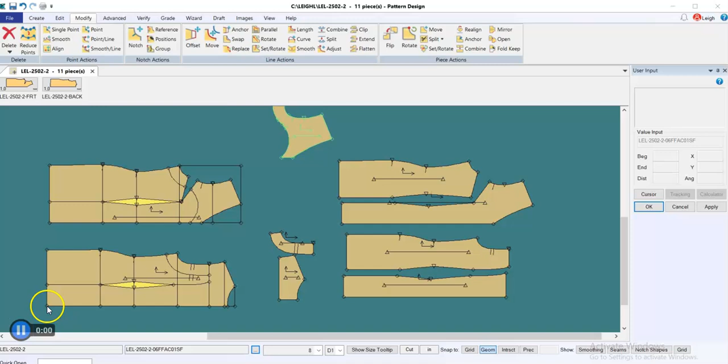You're going to need to add seam allowance. In the handout, I specified 3/8 inch seam allowance all the way around, and then 1 inch double turn hem at the bottom. So I'm going to show you how to do the double turn. You guys know how to add 3/8 inch seam allowance to pieces. Okay.

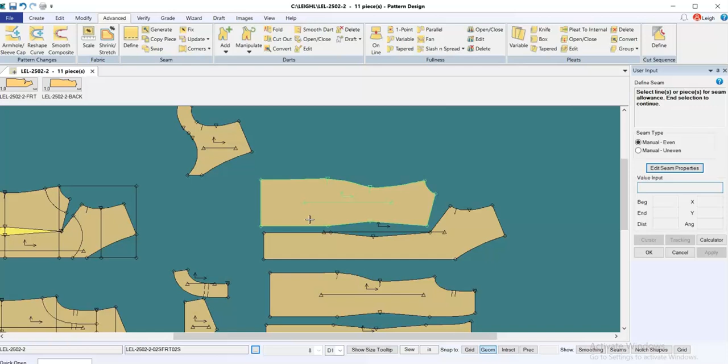I have seams turned off. Okay. You could even just select all of your pieces and say 0.375. Okay. For the bottom hem, you're going to select your center front, center back, side front, side back. And you're going to give 1 inch.

Okay. Now, the double turn comes from corners. You're going to go corner, turn back. You're going to choose second fold, 1 inch. You're going to notch extension, and you can go ahead and notch both sides. Okay. You're going to select the bottom line, select the bottom line, select, select.

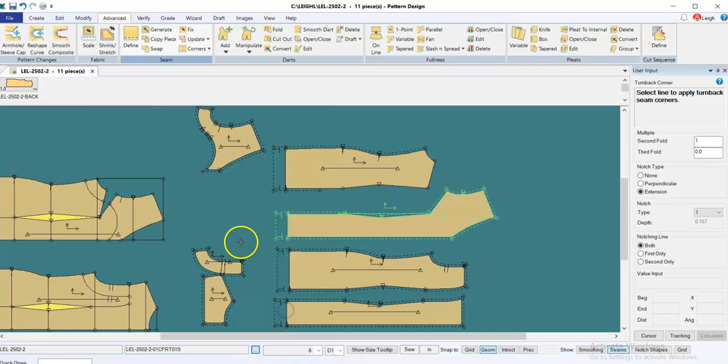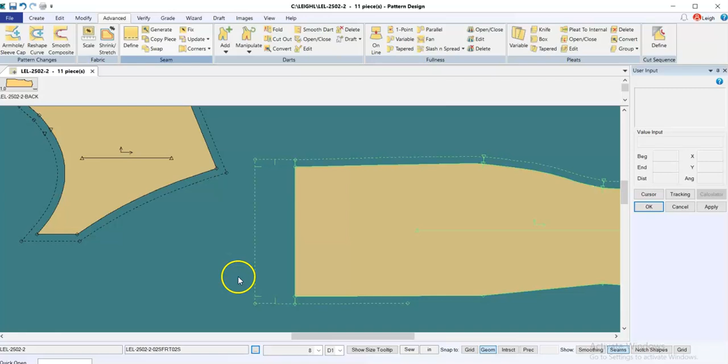Okay. So basically what that does is it takes your already existing 1 inch hem and it adds an additional 1 inch fold. So you could do a 1/2 inch fold and then a 1 inch fold. It's up to you, but all you're specifying is that second fold when you do the corner, and it's going to add on to your already existing seam allowance. So now I have a 1 inch double fold. I get a notch there. If my piece was super shaped, I would get a nice shape, and I wouldn't have to do that manually.

So once you're done with all of your pieces, you're going to close your model. You're going to go and open it in Model Editor. In Model Editor, we're going to first name our categories.

Okay, this is first piece. Okay. This is front measure. I'm going to call these my measure pieces, back measure, because that's their purpose right now. If I wanted to go trace off different pieces, change the style lines, they're just kind of that block piece that's holding my measurements. I'm going to use that code that's in the middle of my pieces.

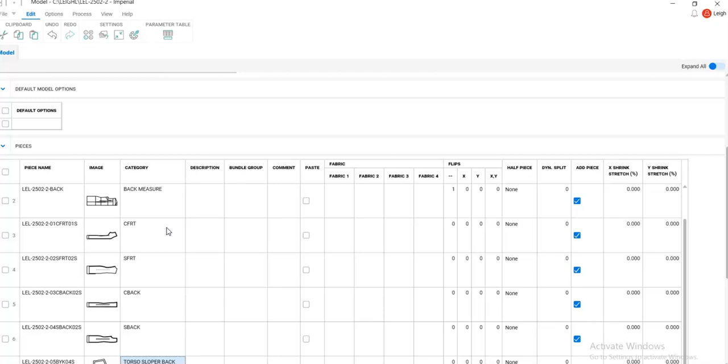Side front, center back, side back, back yoke. Oh, I do have those temp pieces in there. Okay. This is back facing, front facing.

Okay. I am going to change this to 0 for my measure pieces so they don't show up in my marker. For center front, I want 1. For side front, I want 1 and 1 with flips. Center back, I want 1 and 1. Side back, I want 1 and 1. Back yoke, I want 1 and, nope.

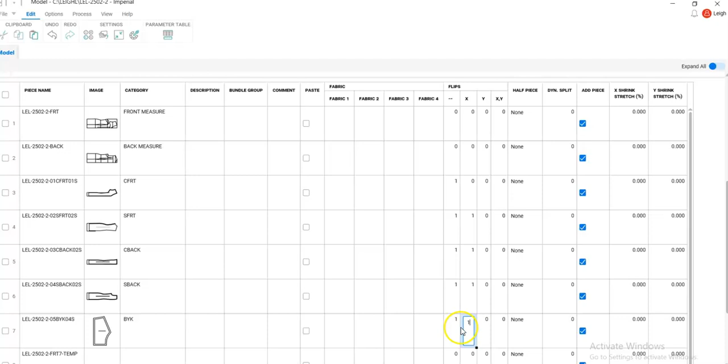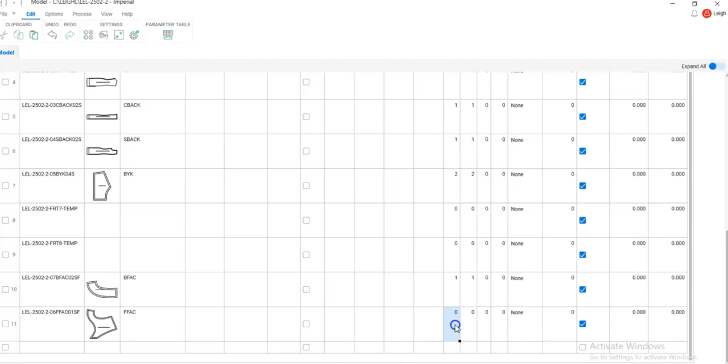Back yoke, I want 2 and 2. These I want 0. Back facing, I want 1 and 1. Front facing, I want 1. Oops. 1. Okay.

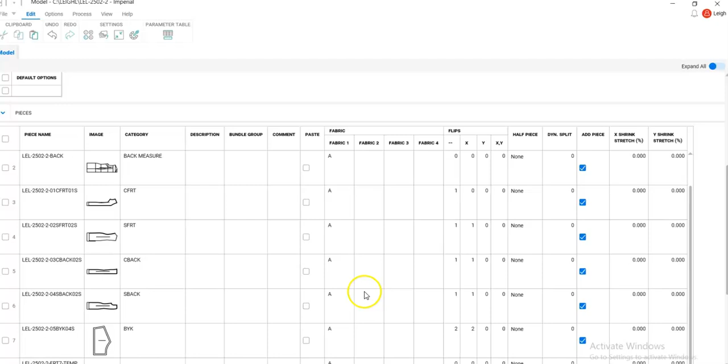Then for my fabrics, fabric 1, I'm going to put A in every single piece, even my measure pieces. If you don't put anything in your measure pieces, you're going to end up with a third marker that has no letter attached to it. Okay. Then in fabric 2, because we have self-fusible pieces, for our 2 facing pieces, we're going to put a B in fabric 2.

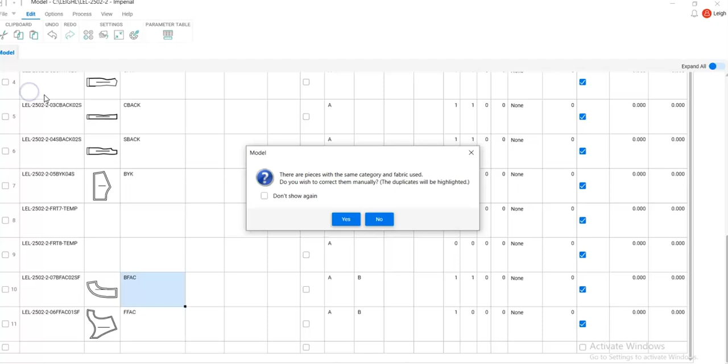So basically what that says is this piece gets cut in self and fusible. So this is our fabric 1, this is our fabric 2. If we had separate fusible pieces, we would just put a B in that column. But since these pieces are serving 2 purposes, we're going to leave it like that. I'm going to go here and I'm going to say file, save. Okay. Oops.

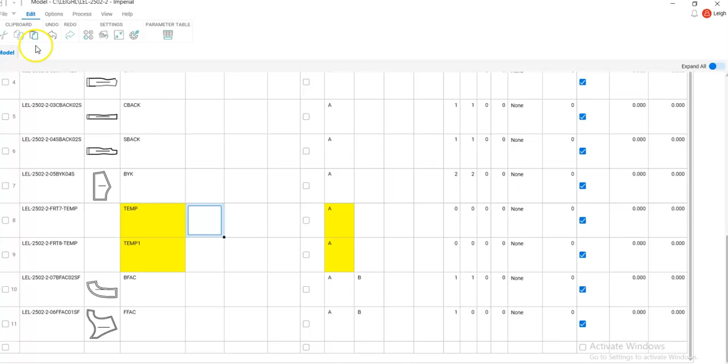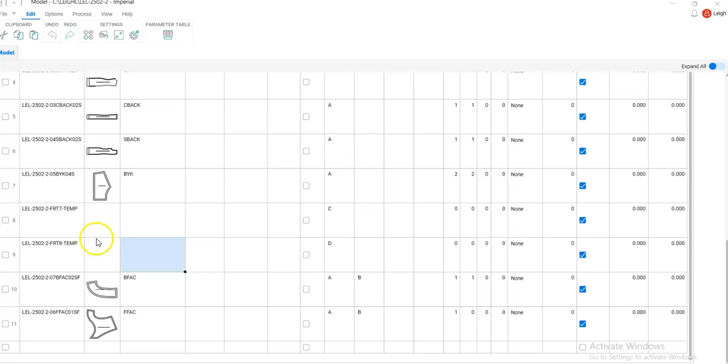Okay, I think it's not letting me change the category because these pieces don't exist anymore. So I just changed these letters so that it would let me save. Otherwise, it wouldn't let me save.

I'm going to close this and go back to my model in PDS. I'm going to go File, Create, Edit Model, Remove Pieces, and get rid of these temp pieces and say OK. I also realized that I forgot to mirror.

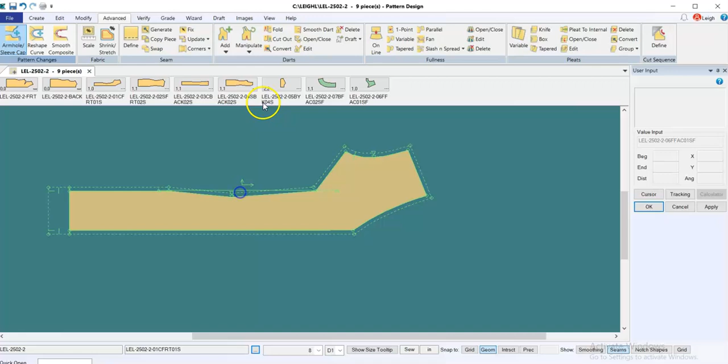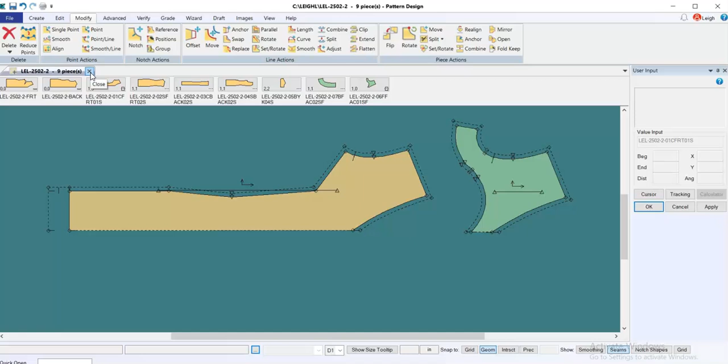So mirror, fold after mirror, you can go ahead and just notch both ends, mirroring the center front here, and I'm mirroring the center front here. I realized that because I was putting in cut ones of those center fronts, my piece wouldn't have opened up when I finally made my marker.

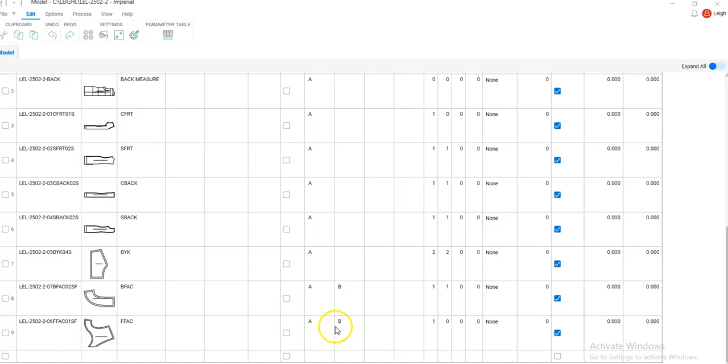All right, so now that is done, I'll just check my model editor one more time. I'm just checking everything's saved, even though I deleted those pieces. Everything looks good. I'm going to close this.

With my model selected, I'm going to go to Process, Easy Order. Okay, I'm going to expand this.

First thing I'm going to do is name my marker prefix. So I'm going to call this my initials 2502. We should see this down here. You should have an A and a B. If you have a blank third row that has no fabric type, chances are you have your block pieces, your measure pieces in your model editor, and they aren't marked 0 or they don't have A's in them.

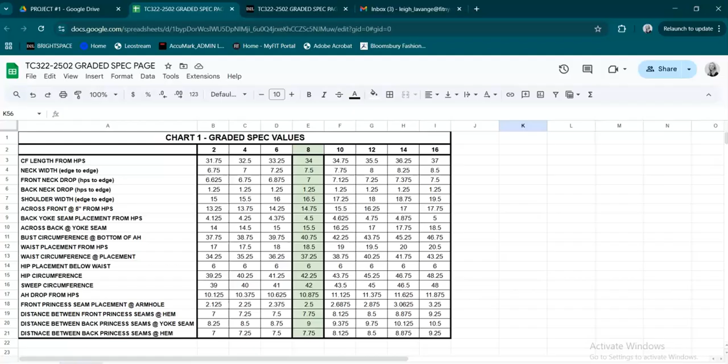Even though we're not cutting them in self fabric, we still have to put them in a fabric category. We are going to update our fabric, 54 and 45. So fabric A is 54, fabric B is 45.

My order quantities, you have to figure that out with a common denominator. So my common denominator here, if I want to try 12, 12 goes into 24, 12 also goes into 36. So 12 divided by 12 is 1, 24 divided by 12 is 2, 36 divided by 12 is 3. So really I would have 1, 1, 2, 2, 3, 2, 1, 1.

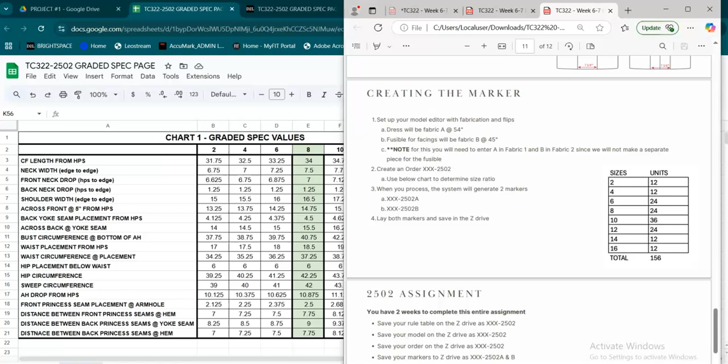So I'm going to type in 1, 1, 2, 2, 3, 2, 1, 1. I'm going to hit Save, Process, and I should get 2 successes, A and B. Okay, close this.

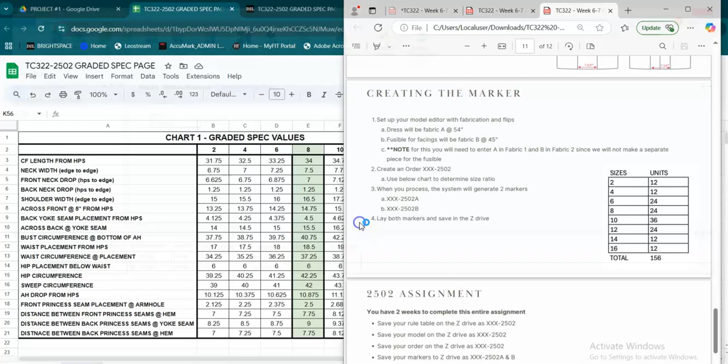Yes, I really want to close it. Go back to AccuMark Explorer. You might need to refresh to see your markers. So I have an A marker and I have a B marker.

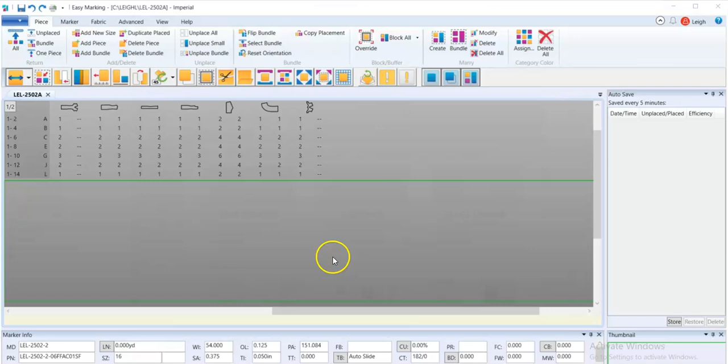If I open these in Easy Marking, I should see my mirrored piece opened with just ones here. 1, 2, 3, 2 ones.

I should see 2 columns for anything that I did a 1 and a 1, a flip. So the sides, the center backs, the side backs, the back yokes should have doubles. Back facings and the front facing should also be mirrored.

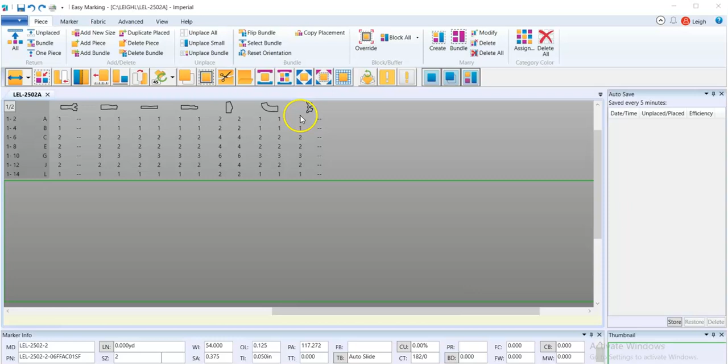So you're going to lay these pieces as you know how to do, and you'll collect that final length. You're also going to then lay this marker.

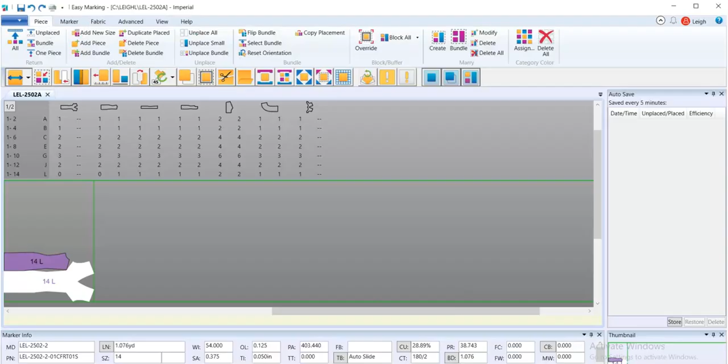All this is going to have in it are your facing pieces. You have a narrower fabric width here, but you also have little pieces, so hopefully you can get them all squeezed in there. You're going to collect this length as well. Please take screenshots of both of these.

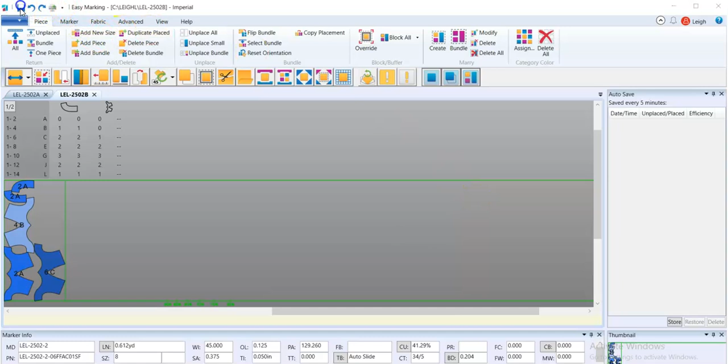You're going to save them when you're done. And then in your assignment, you are going to answer this fabric question. The tricky part here today is that you have 2 fabric costs and 2 separate markers.

So you're going to have to run a per unit fabric cost for A and for B, and add them together to give me what the total cost per unit would be. And that is it.